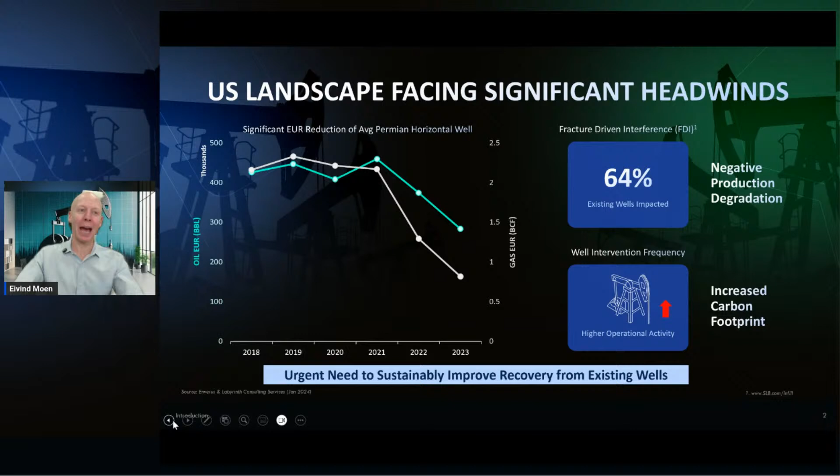And I think maybe for the first time, at least in the shale business, we're seeing an increased focus on capital discipline as well. So, Eddie, the backdrop right now is great to look at existing wells and get more out of those, in addition to continuing to drill new wells.

Really from our experience at Emerald Surf Sciences, we've seen a lot of interventions in this space happening with mature wells, in the vintage of 10 to 15 years of age, with some of the really early technology around frac programs. One of the big things that we want to see out of intervention, clean outs, and then restimulations is really gaining efficiency and learning the best practices of all of the work that both of our companies have done.

One of the things that we do specifically that I believe helps drive efficiency is the use of our HydroLyft colloidal gas aphron fluid. It's a variable density fluid. It allows us to circulate a well with no pressure or on vacuum, barrel in, barrel out. And that really comes in a reduction of field water or fresh water that you might want to use for that well during a clean out.

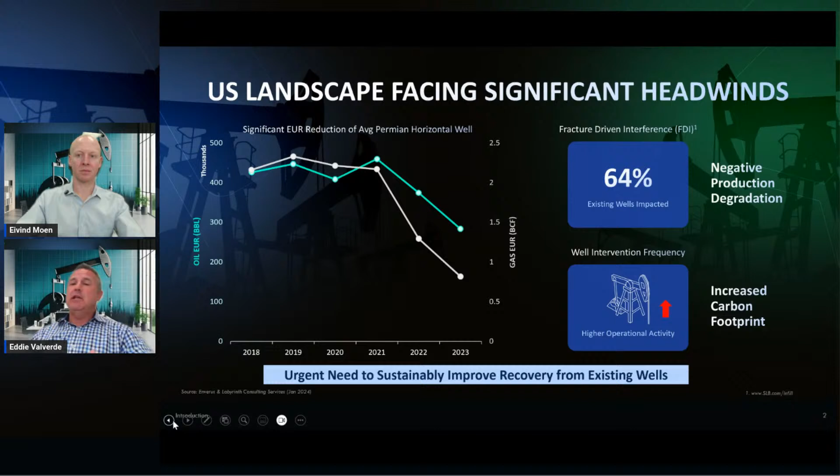And the other thing that I'll mention, especially since we're talking about carbon footprint and allowing our operators to put out better ESG messaging: our fluid is recyclable, meaning you build the fluid on the first well, and if properly treated and filtered, you can use it on subsequent wells, which means you need way less field water and fewer trucks coming on location. So both HSE and ESG are covered there.

That's really where our specialized fluids and chemical regimes come into play. Being able to modulate the density, being able to generate a fluid that goes all the way down to 4 pounds per gallon equivalent density, HydroLyft really allows us to clean the well and then prepare it, so then your Excite system can come in and do some restimulation.

Yeah, so as Eddie mentioned, pollution or debris in the wellbore is one main issue for why wells are producing less than what they could be.

And another one is formation damage. And I think on the formation damage side, acid stimulation has been historically a very popular way to revive production in the well. And historically, our industry has bullheaded these treatments with somewhat the obvious drawback that we don't have a whole lot of control of where that treatment ultimately ends up in the well.

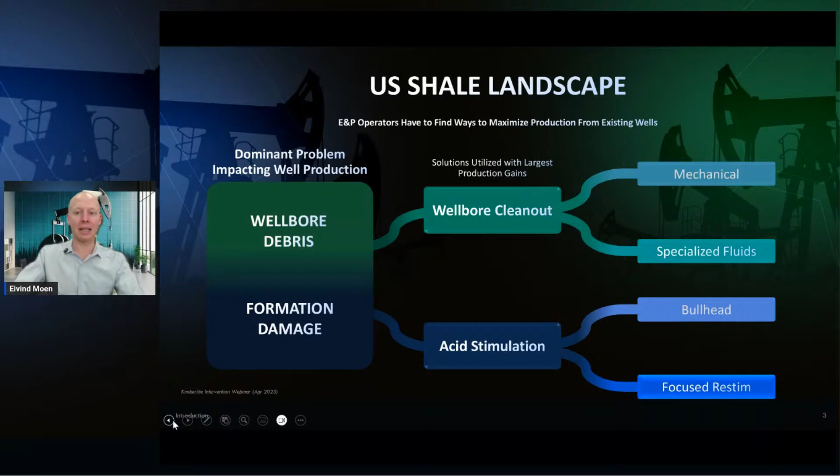So the approach we have taken instead is what we call a focused restim, where we can divide the wellbore up in many, many zones and then treat one stage at a time with acid. And then with that, ensure that the entire wellbore is indeed treated. And this kind of forms the platform for increasing production from existing wells that we work from.

And it's really derived, I think, from many years of experience at our company, and also I think from Emerald Surf, working on older and existing wells. And we can probably divide the process into two main categories. The first two steps here kind of become the homework that we do upfront before we actually go out and work on a wellbore. Identify underperforming wells as candidates, identify why they are underperforming, identify if there's anything that can be done to treat these wells and lift production back to where it could be.

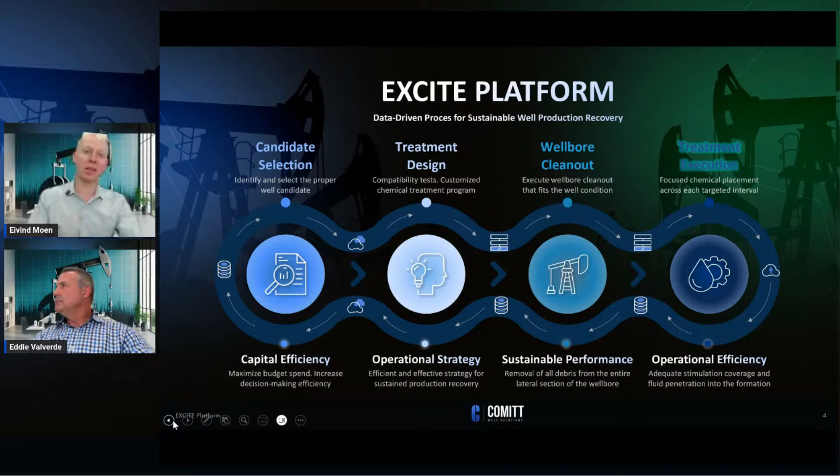And then on the operational side, the wellbore cleanout to get debris out of the well, to prep the well for a potential acid treatment on the back end, and then ultimately placing the correct treatment selectively across the lateral. So let's dig in a little bit more into each one of these processes, especially on the cleanout side and then on the selective treatment side as well.

So Eddie? Yeah, thanks for handing that off to me, Eivind. I want to remind everyone as we move from slide to comments, both of us are experts in our field, and we can certainly field the questions that you have coming.

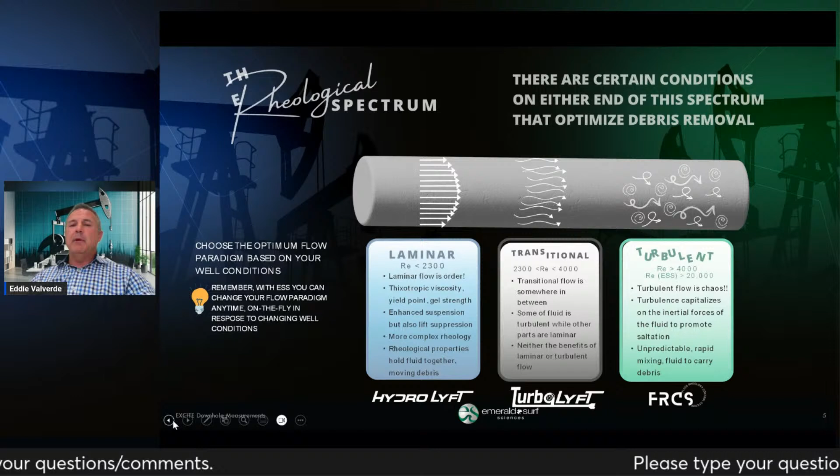So really, when you talk about rheological spectrum and the choices that you have around circulating a well and getting the debris out, you go all the way from the right, which is a turbulent flow system, which in our case, we call fluid rheology control systems. This is a slick water system where potentially you might have to spot some LCM to then get a slick water system to circulate. Some of our newest technologies, our transitional fluid goes from turbulent to laminar. Our TurboLyft system, you also have the ability there to modulate the density, in some cases down to about 6.5 pounds per gallon.

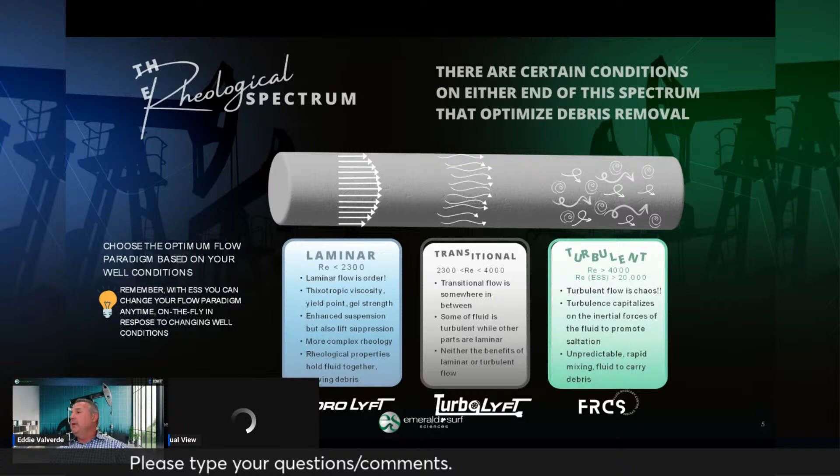But really, our most successful system is our HydroLyft system, which is a laminar flow system. This is a system that has great fluid stability, enormous carrying capacity because of its gel strength, but we can still modulate that density down to 4 pounds per gallon and get that well to circulate barrel in, barrel out. And that's a lot of the successes that we're seeing. And I think some of the case studies that we're going to cover today, Eivind, both from our company and your company, and jointly some work that we've done, really identify the candidates and the ability to circulate those wells with HydroLyft. Yeah, for sure.

Dissolvable plugs. In any well that still has plugs in the well, that could be because the coil unit potentially wasn't able to reach some of those plugs, so they remain in place. The dissolvable plugs, I go back to some comments I made about those vintage wells of 10 to 15 years. Believe it or not, we intervene a lot of wells where those plugs were supposed to be dissolved. They're still there, so that's trapped virgin production.

Anything that's frac hit, we hear that a lot today, especially in the Permian Delaware Basin, where you have close spacing and these big frac jobs that are going on. Those wells need to be brought back online. So getting them cleaned out and then re-stimulated is very important. And really, as a production or reservoir engineer, anytime you see a sudden deviation in the type curve, that is a perfect candidate for intervention, clean out, and re-stimulation.

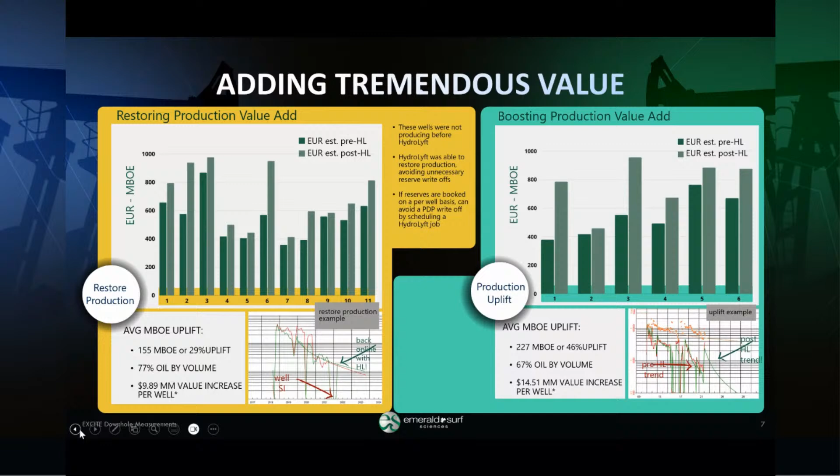The backbone of our system is really around live data. So our OpsViewer live data platform is coupled with HydroLyft and really any of our fluid systems. Specifically for HydroLyft here, our goal is always to break circulation, to get circulation going as early as possible. Sometimes that requires some of our proprietary technology around the LCMs and spotting those before we go chase it down with a 4 or 5 pound per gallon HydroLyft.

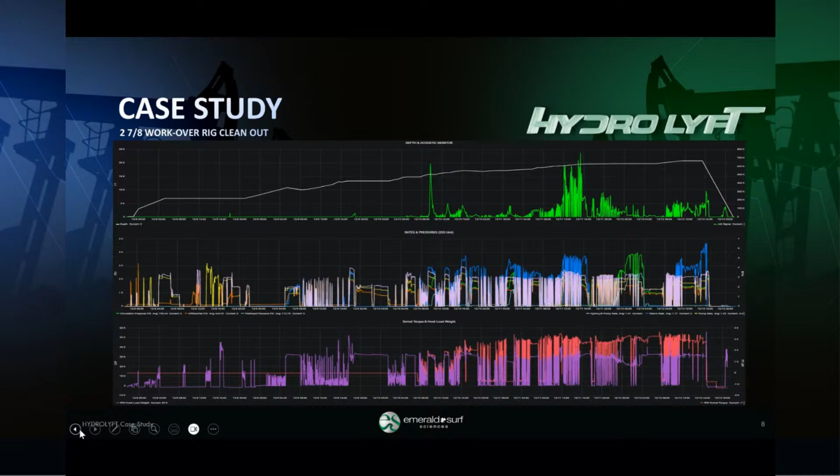So Ivan, I know that one of the things that shocks some operators the most, especially when they make the trip out to location, is the amount of debris that comes back from some of these wells. Yeah. You know, and many times it exceeds the volume of the wellbore in terms of how much sand it could hold. In this same case study, we're talking about 2 roll-off boxes. And any of us that spend time in the field, 2 roll-off boxes is the equivalent of 70,000 pounds of sand. And 70,000 pounds of sand that comes out of a wellbore is significant.

So think about how much obstruction that causes when that well is trying to breathe and produce, and that artificial lift system is trying to work overtime to pull product from it. So removing bridges, removing debris is always the goal, and doing that with a colloidal gas aphron fluid like HydroLyft with high stability and high carrying capacity is really the key.

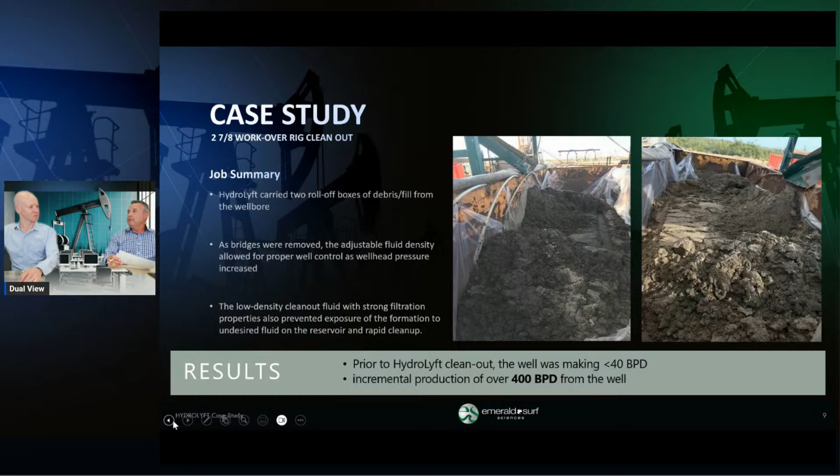And in this case study, this is a definition of an intervention and then a restimulation. We're talking about a well that was doing 40 barrels per day, and that well came back online after flowback to 400 barrels per day. So significant increase from an existing asset that was potentially going to be written off.

Yeah, so kind of following the cleanouts and assuming the wellbore also needs some additional treatment, that's when the selective treatment part of this comes in, and this really is, formation damage is a wide topic, but basically we can define it as anything that's blocking or limiting flow of hydrocarbon to keep the well from producing to its full potential. And I'm not going to go into all the details about the sources of this, and I think operators tend to know their field better than we do.

But it can be various kinds of scaling, and also a lot of the projects we have worked on have been when we've had to use diverter in the wellbore, and there may be some residual diverter from the cleanout that we need to break down with acid following the cleanout. So doing this, we use the isolation system, the Excite system here, where we can space packers out to accommodate pretty much any stage spacing we need downhole, and where we can target each stage individually.

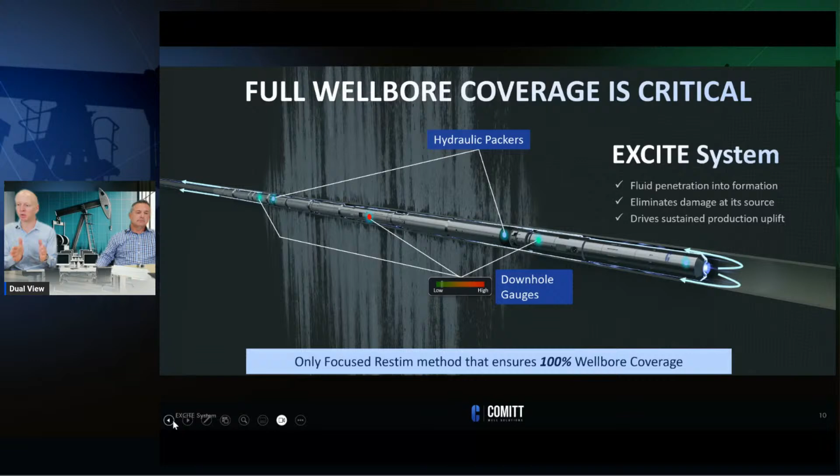So the process is basically to run into the bottom of the wellbore, activate the system, place your acid, unset the system, move up to the next stage, and then keep treating one stage at a time until the entire lateral is treated. And then during the job, we'll also collect downhole data on temperature and on pressure. So we basically get a full overview of how effective the treatment was, at least the efficiency of the treatment.

I think this is really key, because if we're going to remove all formation damage, we have to make sure we're also treating every stage downhole. And so some sort of focused restim basically becomes the only way to do that. And then we can verify the efficiency of the treatment on the back end using the downhole data.

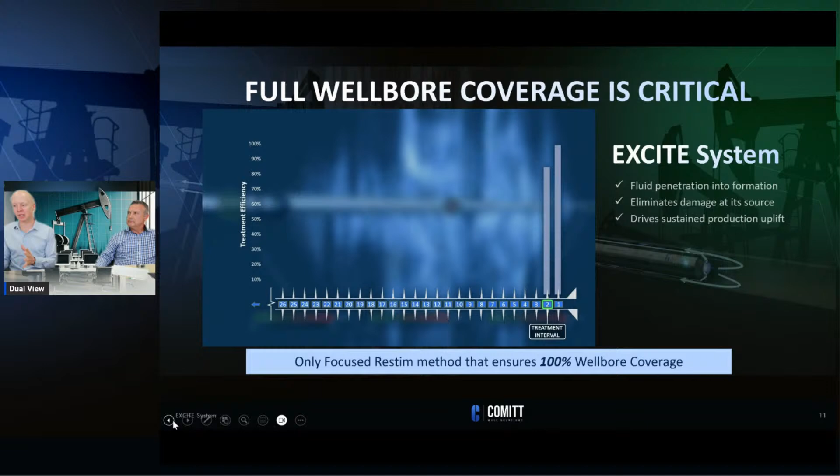So maybe we'll dig into a case study on this one too, where this is a case where both a cleanout and a treatment of the formation was needed. This is a frac hit wellbore that basically lost all of its production following a frac hit. We went in, and this is before Emerald Surf and Comitt started working together. So this was a cleanout with a Venturi style system.

Basically got a lot of sand out of it, got production return, but the operator here estimated a 30 to 40% reduction in EUR. So the well produced for a while. Following that, we came in and did a focus restim. This is a mile-long lateral, 30 stages. We did 30 treatments here with acid.

And I think we'll do one more case study here. This is the one where we worked together, wasn't it? Yes. So this is in the Midland Basin. It's a 2-mile lateral in this case, 56 stages. So it's a case where we did a clean out and an acid treatment. And maybe, Eddie, if you want to speak a little bit to the clean out to begin with.